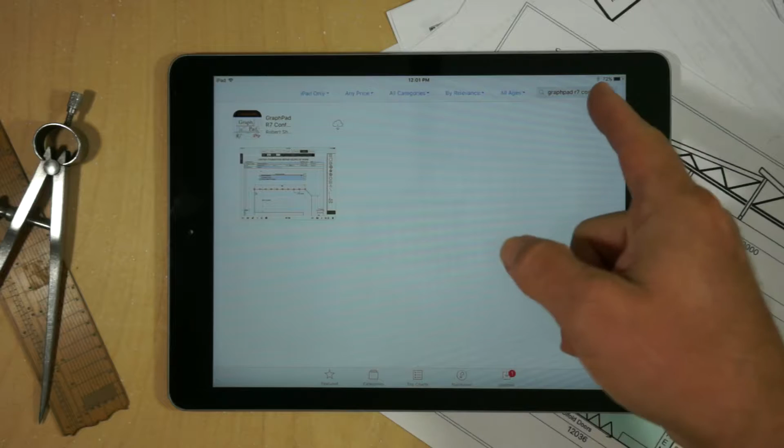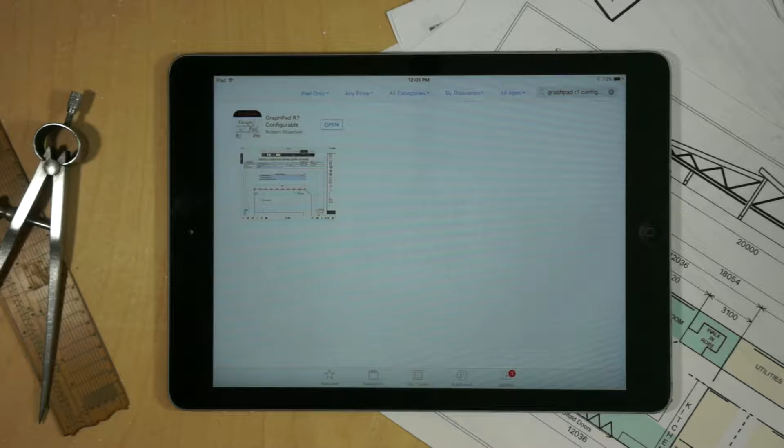So we're going to start by just going out to the App Store and seeing how you find it. To search for it, you've got a search screen that comes up, just type in GraphPad or GraphPad R7 and you'll see the application. I've already purchased it. The application itself is free. However, to use it, you need to sign a monthly lease. That lease has a 7-day grace period, so you can start working with it, and if you don't like it and terminate within 7 days, you won't be charged.

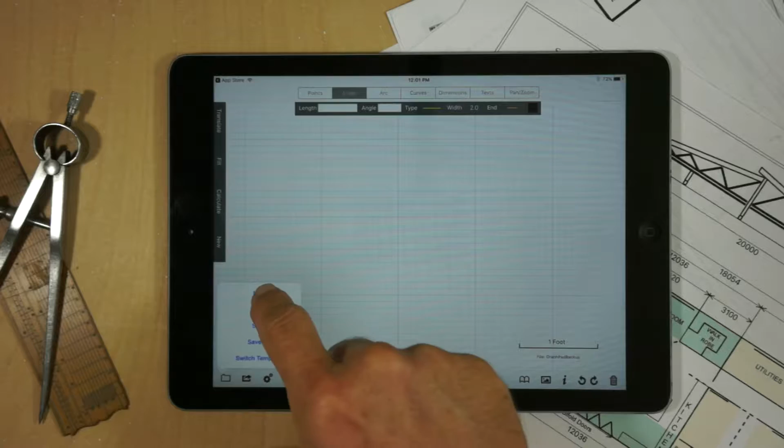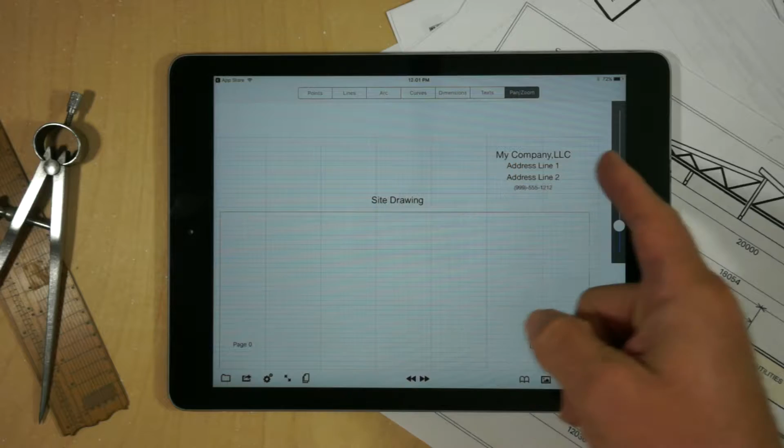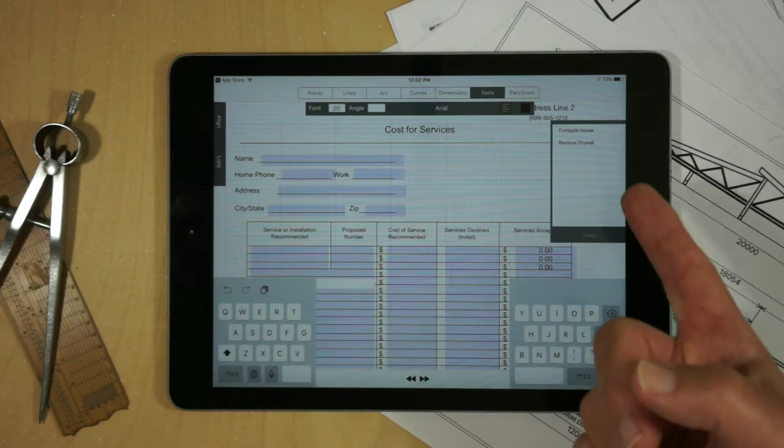So we'll go ahead and open the application. At this point, it doesn't have any of your company information. We'll go ahead and show a new contractor proposal, and we'll see it's got this default text up here. It actually tells you these are the lines, this is how it's going to show for your company name and your address and your stuff. You'll notice there's no logo over here. Go to the next page, and if we look at these lists of values, we'll notice there's nothing really in them, just a couple of dummy fields, and if we go to another field we'll see the same thing.

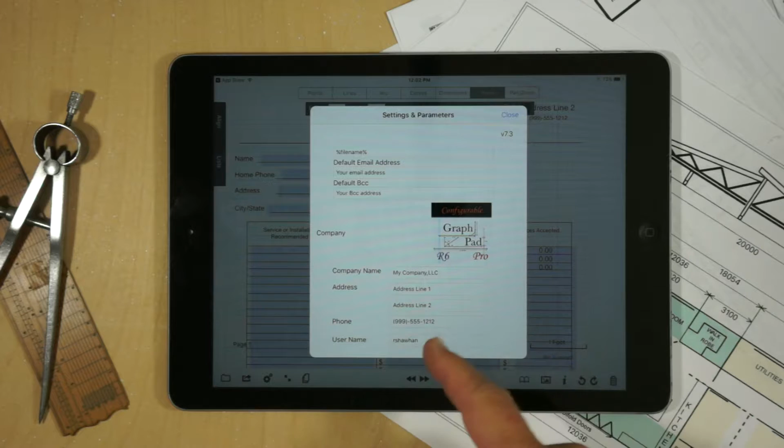So in order to configure it, first thing we're going to do is go into the settings, and scrolling down we would set our company name and address. Now I'm not going to do that right here since it takes some time, but to get your logo into it, what we need to do is get your image into the format I use throughout the application.

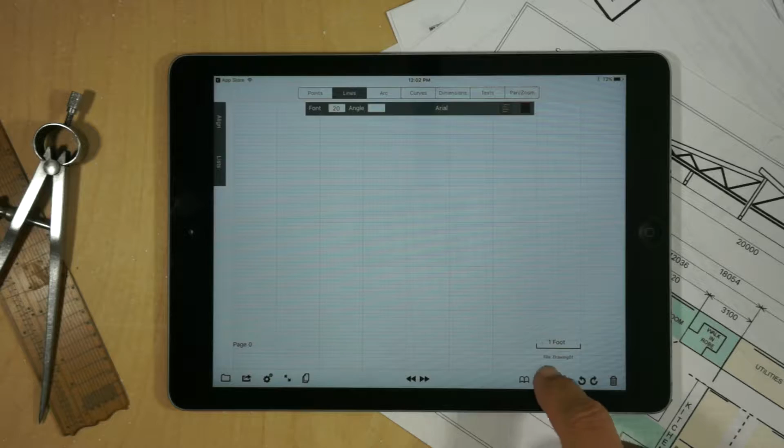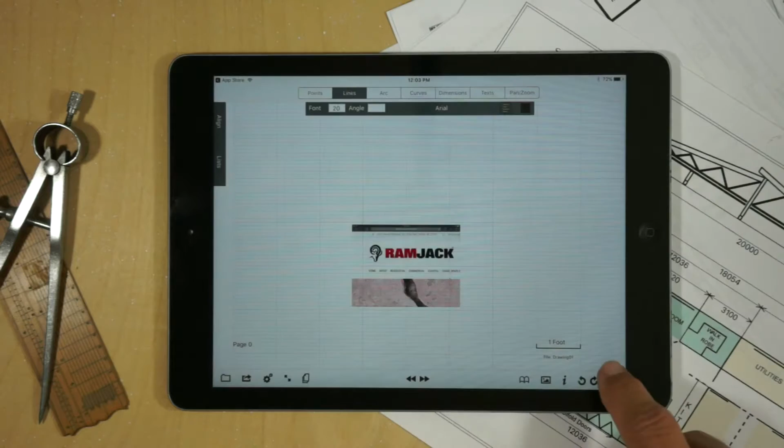So to do that, I've gone and grabbed a screenshot already of this Ramjack logo. Now if I just drop it in there, you'll notice it's way too small, and you could zoom in, but it's going to be coarse. What we need to do is change it so the import image size is as large as possible. So now I'll just delete what we've got here, and if we import that image, we'll note it's a much better resolution, much easier to work with.

So to get it in the correct format, what we're going to do is select the area we want for our logo, go to Copy Group, and then hit Create Image. What that does is puts it in the image library in the correct format.

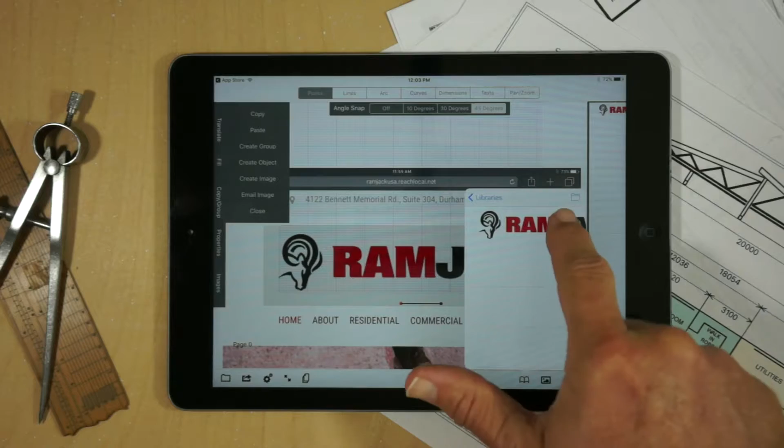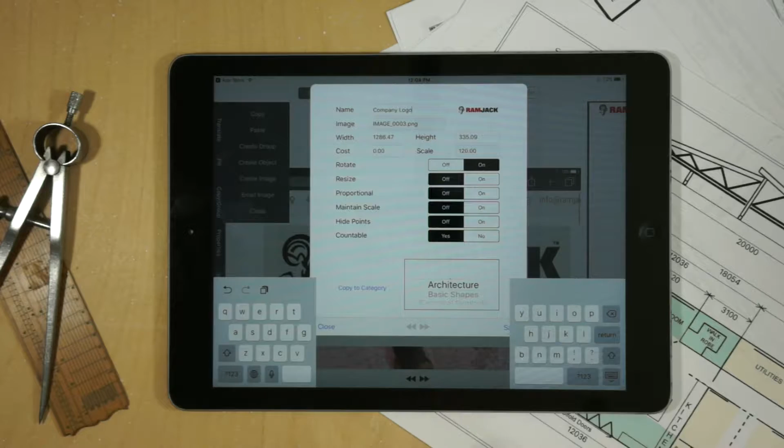Now if we go to our library, images, hit the I button, and select the image. If we change the image name from New Object to, press this field here, capital C Company, capital L Logo, and we'll type that in. If we set that to that name and save it, now if we go back into the screen over here...

We'll notice that our company logo is displayed, and when we open a new form, contractor proposal, and scroll down, we'll see it's got our logo on each page. And of course our address would be the address we set up as well.

Now by default these fields don't have any information. You can enter them yourself. So go to Countable Items, which is the first group, select it, and hit the I button. Now we could actually put in the values we want. We can add and remove values and put in a cost. We would have to save after each page.

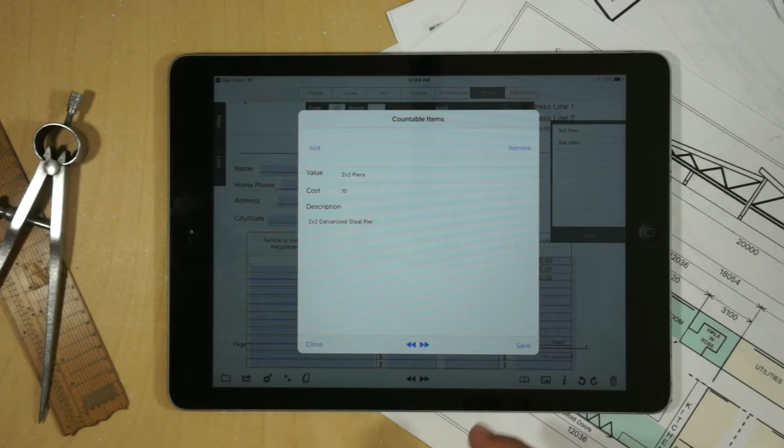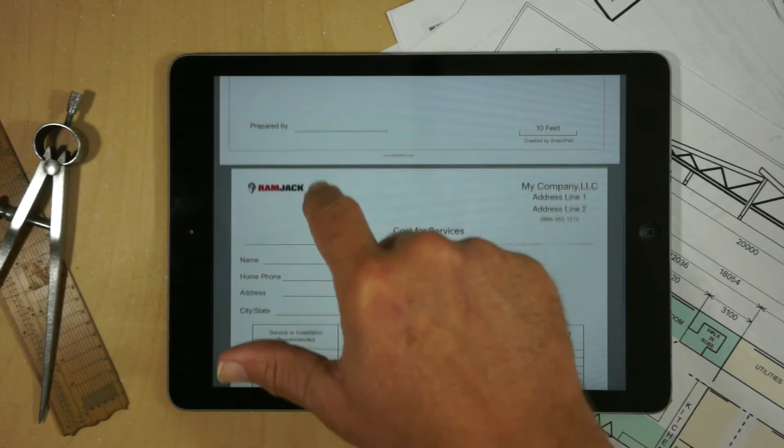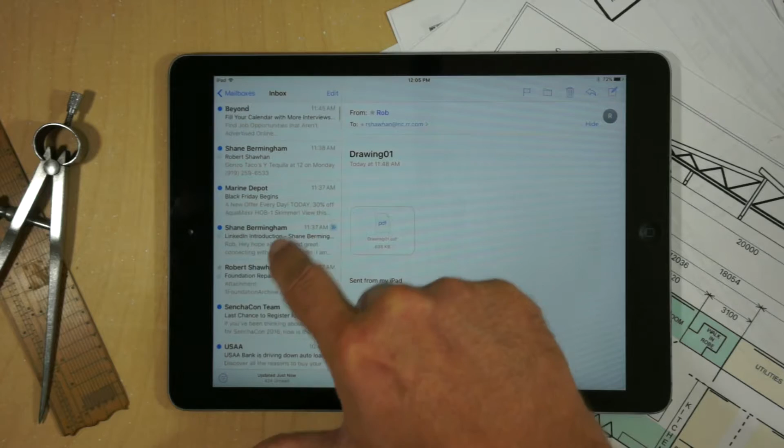The other option is to purchase a setup from me. What I've done is emailed myself a setup, so if we go to my email... we look at that particular drawing, see, we want to go to... there we go, foundation repair. It's going to come in as a file, you'll see a small icon for GraphPad. If we press on it, we'll see that it allows us to open it within GraphPad.

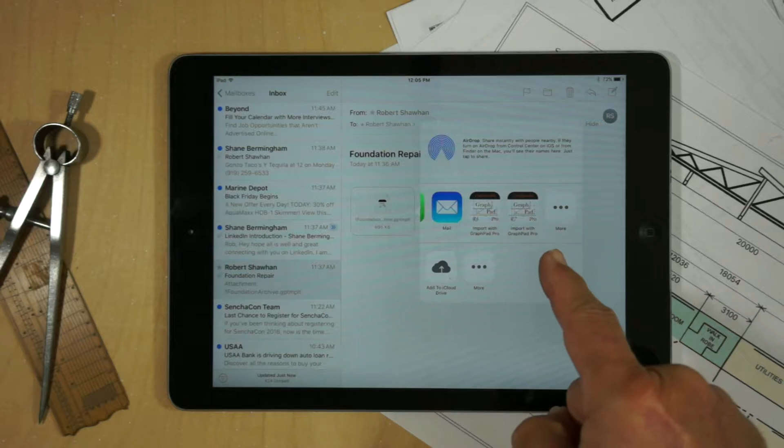It's going to bring GraphPad up, and you're going to think, well, what happened? What happened was these list values got populated. So if we go over here, now we see additional items in here. If we go to inspectable items, you will see different items and services, a whole bunch of stuff.

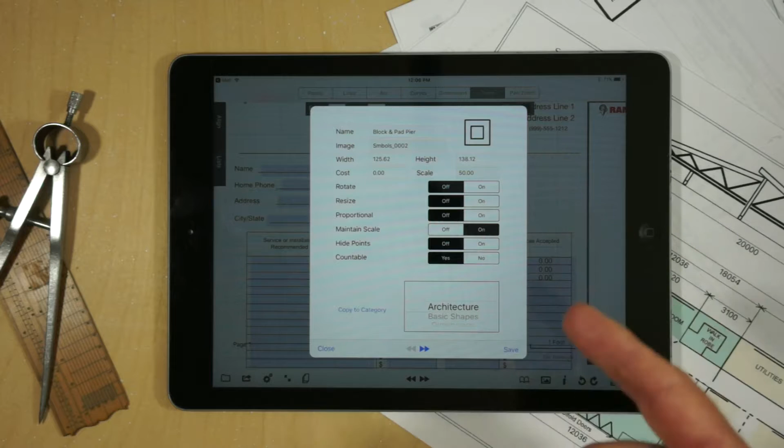Now with the foundation repair setup, we also have, if we go back here, different libraries added. So we'll have foundation symbols, and we can see these foundation symbols. You could change the text that's going to appear, change whether it's going to rotate and resize, etc. You can create another library and copy them all over if you'd like to do that as well.

There's videos on all of this stuff. But we're also going to see that we have drawing labels, which appears over here, and we have dimensions. So here's all your dimensions.

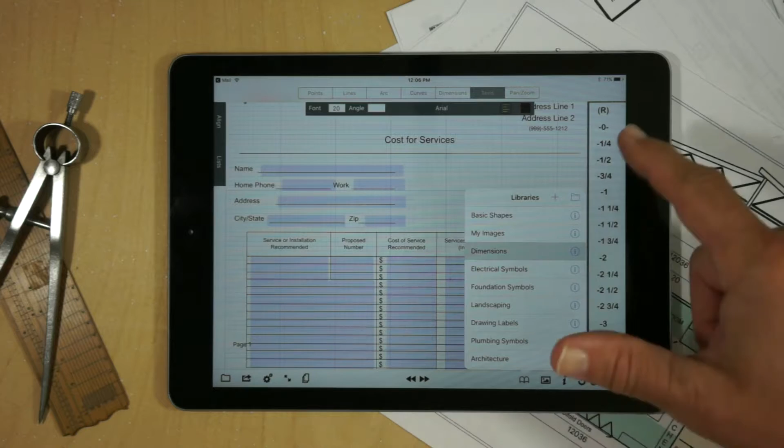Rather than having to type these in, you just select them and drop them on the drawing. So let's go ahead and start through the process of actually creating a proposal. We'll open up a new drawing.

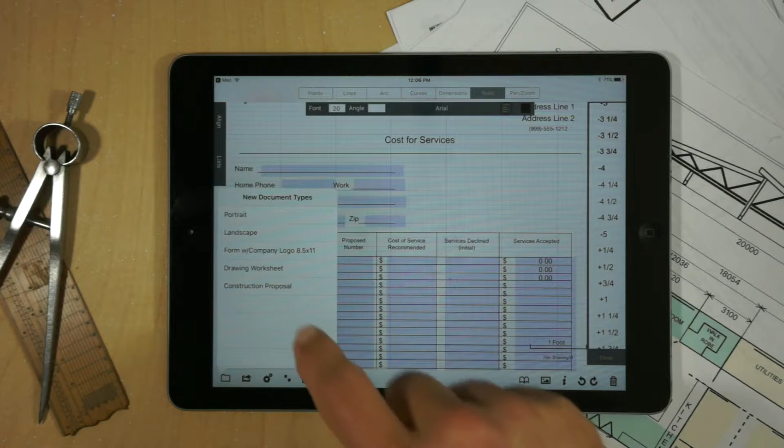The first thing you want to do is save this under a naming convention you know, like your address, the customer name, or if you're a larger organization, a work order number. Save it as whatever you wish. Hit save, it brings up the field, type in the save as. We'll say A1 just because I want to find it easily.

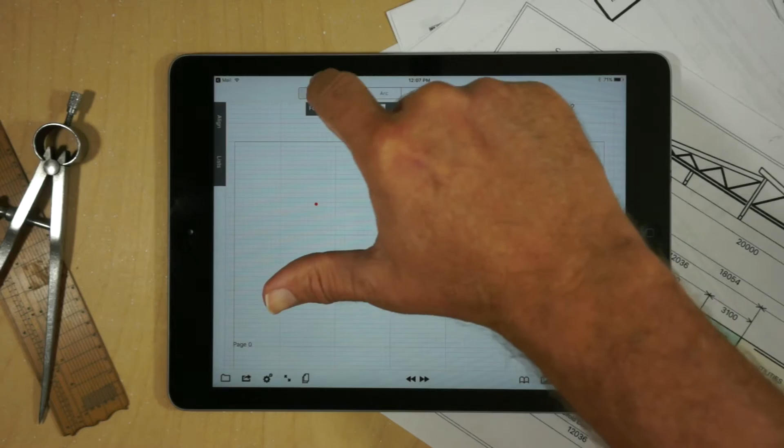We'll notice the file name has changed down here. We can go ahead and start doing our drawing. Sorry, wrong field there. So we'll just go ahead and do a quick drawing.

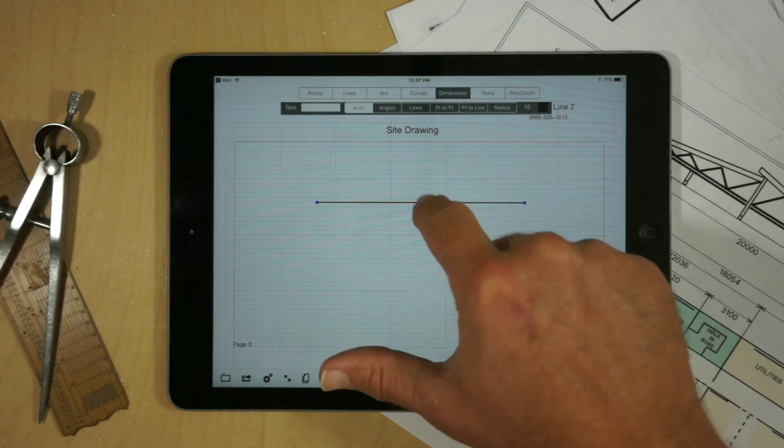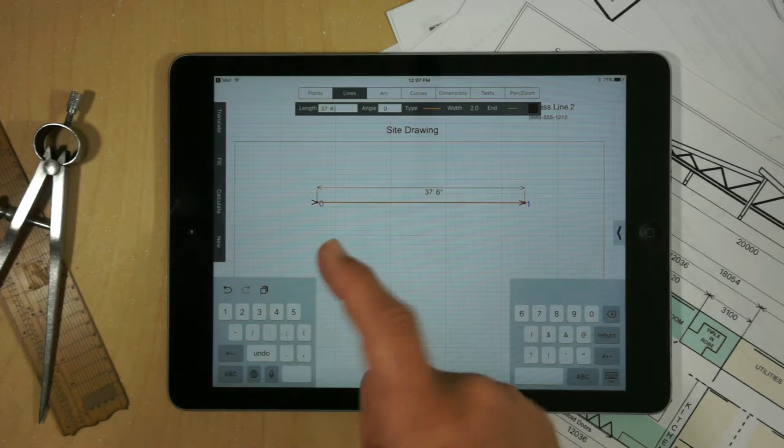We'll notice the length is actually kind of small, it's at a 1 foot scale, so you probably want to change this to 10 feet. Now if we drop a dimension on there, we'll see it's 37 feet. If we're in line mode and select a line, we can change the precise length. For example, if I wanted 37 feet, 6 and 3/4 inches, return, we'll notice it automatically changes the length of the line to be that precise length. The rest of the drawing is graph pad stuff, so it's super easy to use. It does snap in alignment, etc.

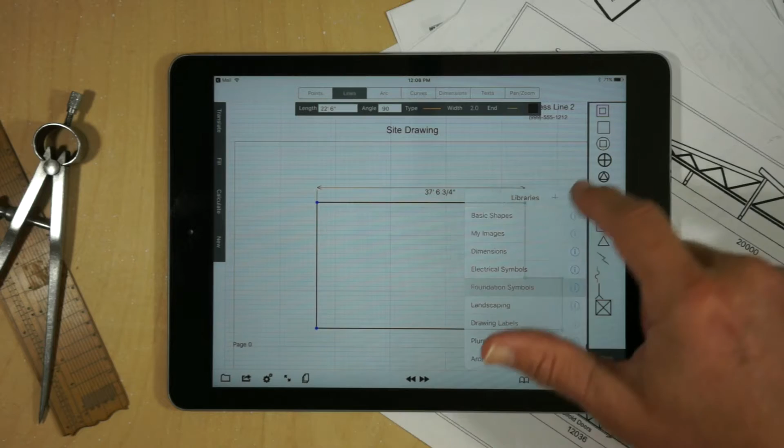For foundation repair, we would just select and drop in an offset, and we can change it to foundation symbols. Select a line, select a symbol type, and it'll ask if you want it spaced at a maximum of 8 feet. Hit calculate and it'll pre-populate those. That's generally how the application works, and with foundation repair you can drop in foundation crack symbols, etc.

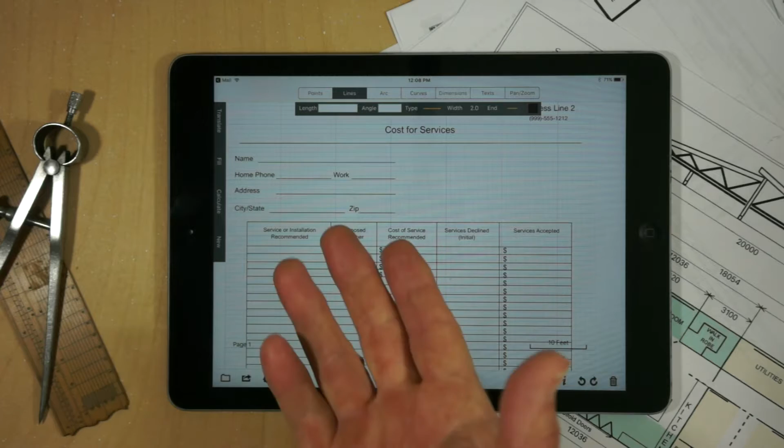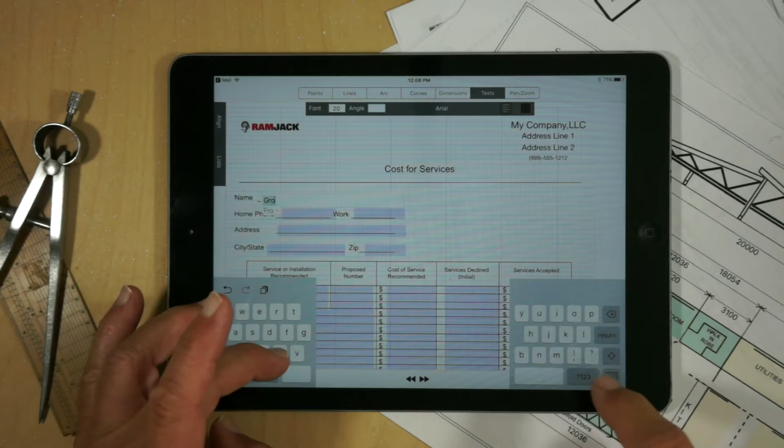When we get to the second page, this is where we put in our customer information. Notice it has the company logo and your company information. You go ahead and type in the customer name, we'll say, I don't know, Grover, somebody's name, etc. And this value is going to be populated on the third page as well.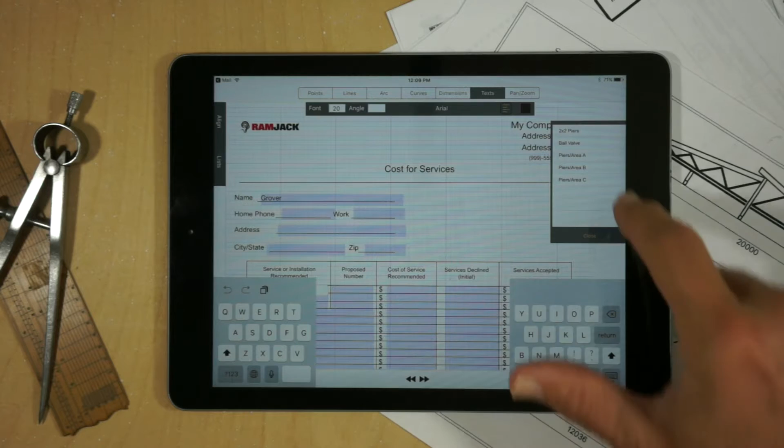Have the address, and this is where our lists come in. When we loaded the foundation repair library, we got these additional values in our list values. So we could say piers, and you'd type in the number of piers, say for example 59. The piers can have a cost associated with them that you'd set up in the lists over here under countable items, piers, where you'd put in that cost value, etc.

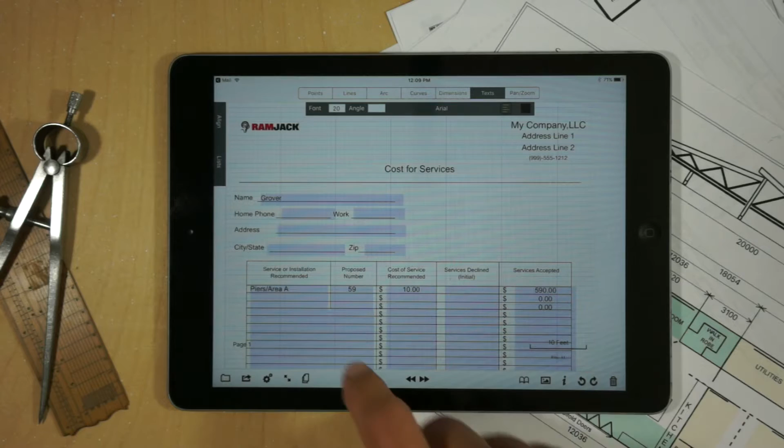Then our services, so we pick a service field, for example exterior wall restraints, whatever the cost was. And as you type in these costs, they're going to be summarized going down in this final field.

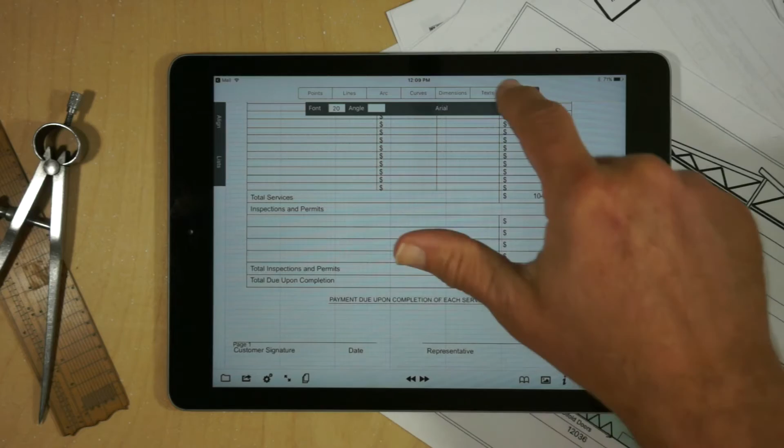You can sign this page, right? Notice it, hit save, come on you can do it. Notice it populates a date for you. It's also, when you go to the second page, that was 1,040, you'll notice that the total cost is populated for you.

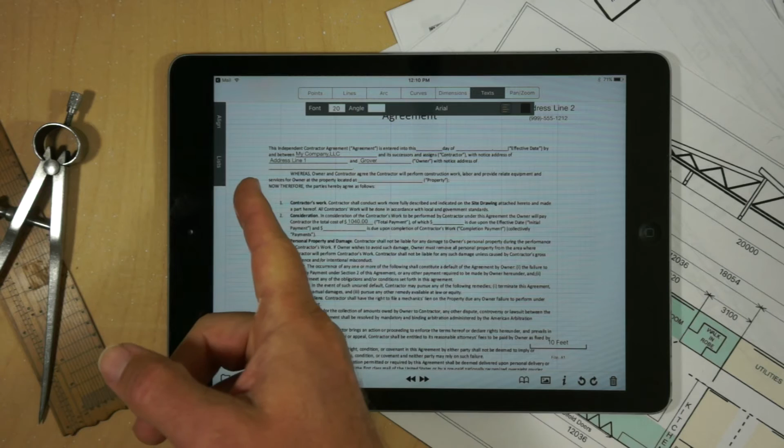You can fill in any other fields that need to be populated, etc. You'll notice that the name and your address came across, the client's address would come across as well, etc. And that's pretty much how that's going to look.

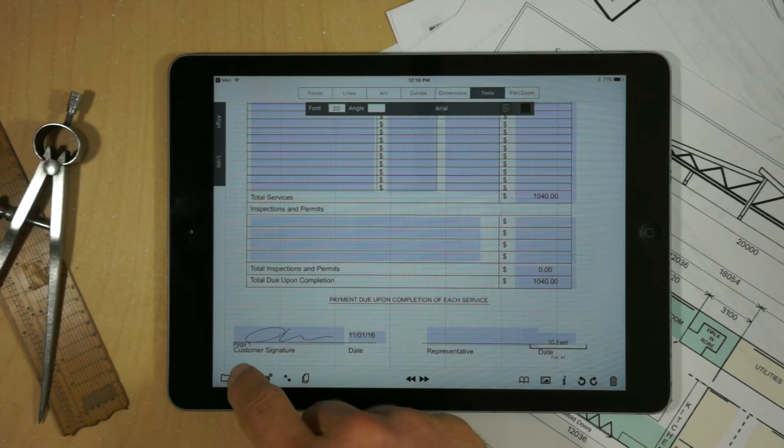Finally, what you're going to want to do is email it to your customer. You would just go and type in my email address so we can see what this is going to look like. You can have it set so you have an automatic blind copy, so it blind copies your office at the same time, and hit send.

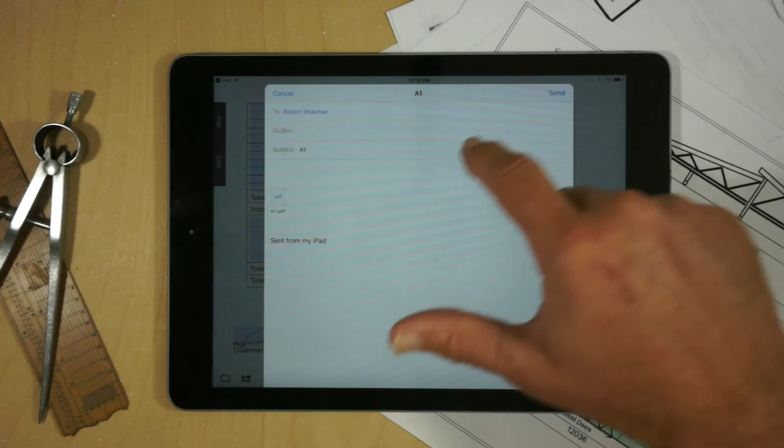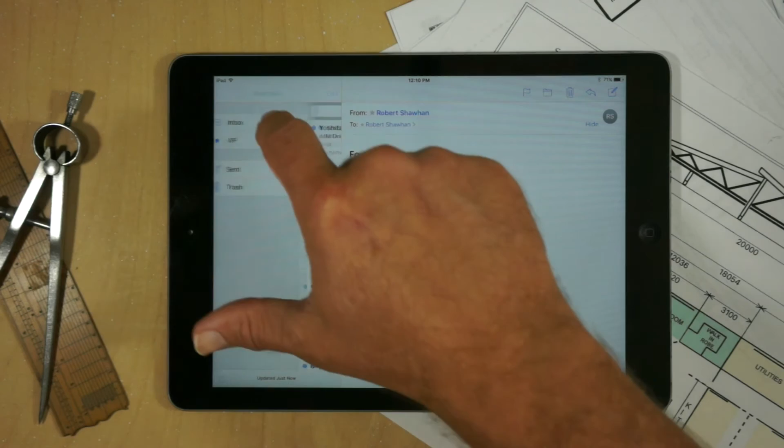What we're going to do now is look over in the email and see what that looks like. Let's see, we've got another one, let me bring this back up. It should download it, there it is. Has our drawing name. And here's our drawing, right?

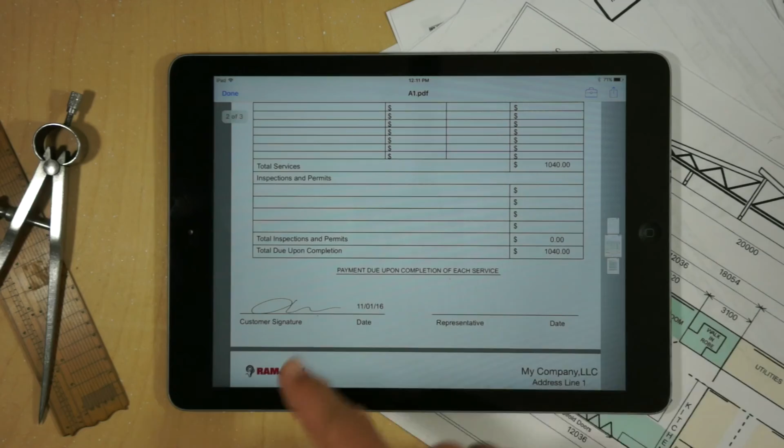So it's got our company logo, it's got the drawing that we put in. Any signatures we populated will show up, and our contract.

So that's pretty much everything that the application does and how it works. I demonstrated how you set it up. I realized I went pretty fast, but the nice thing about a YouTube video is you can back up and scroll and go forward again to actually see those parts slower or multiple times.

But that shows you the full capability. You can actually do a complete contract on the iPad while on the site, and email it to your customer with his signature, and the entire process is closed.

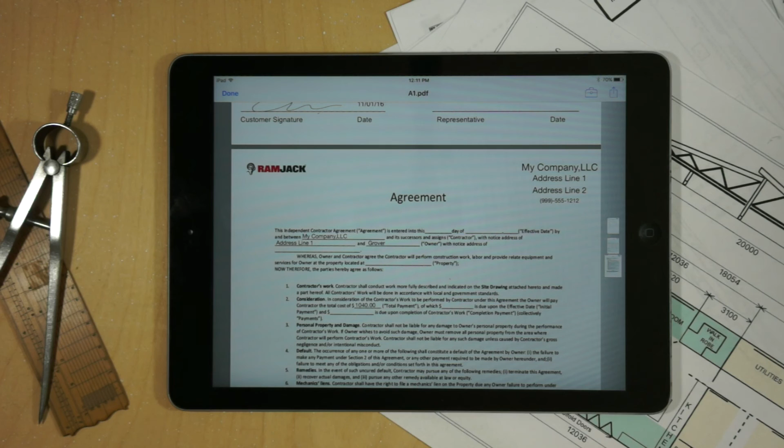Any changes to this form cannot be done on the iPad itself, you'd have to contact me. I actually use a tool on my desktop to make the changes, but I try to make that pretty reasonable. It's pretty easy to increase the size of the logo, for example, or to add another line of text. But if you wanted anything else changed, we'd have to figure out what it would cost to do that.

And that's my presentation. Hopefully this will be useful to people looking at GraphPad. Thank you very much.